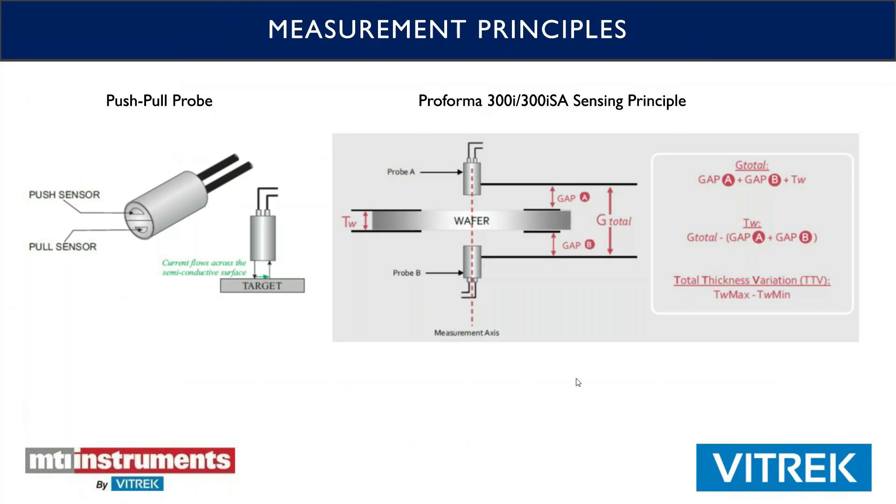Our Proforma 300i is a manual gauge. So basically it's probably the size of a big laptop. So you can put it right on your table or desktop. It has auto leveling. There's a bubble level. You can adjust it so it is parallel and flat for your surface. It's got a non-abrasive Teflon coated measurement stage.

So you just place your wafer on top of the stage, and you can see that the wafer here is in between the probes, and the measurement is shown on the LCD display. So it does have a big LCD display. It does have a USB port on the front, so you can store and log your data for your thickness variation, and there's also a bow measurement that you can do with the Proforma 300i.

All of our technology, both the 300i and the 300 ISA, give you an accuracy of a quarter of a micron, and a 50 nanometer resolution. So this can be used for wafers with a 1700 micron or 1.7 millimeter measurement range. So the probes are adjustable. So if you do have a thicker wafer, you can adjust it, calibrate it accordingly, and get your measurements.

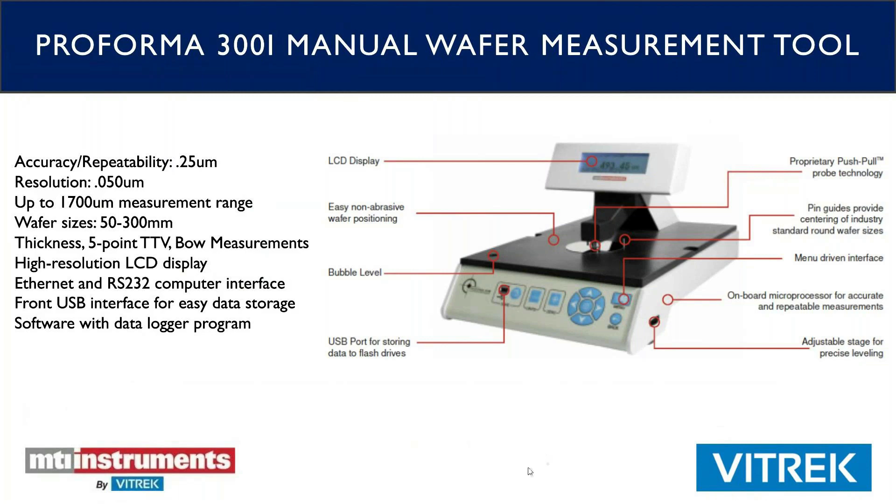And then here's a zoomed in picture of both the front keypad of the device, the display, and a quick snapshot of the data logger program. It does use a voltage from the top probe and the bottom probe, as you can see. And then you can export your data to Excel through a CSV file, save it through there. So you have all of that available to you. So it's a great tool to have on your workbench.

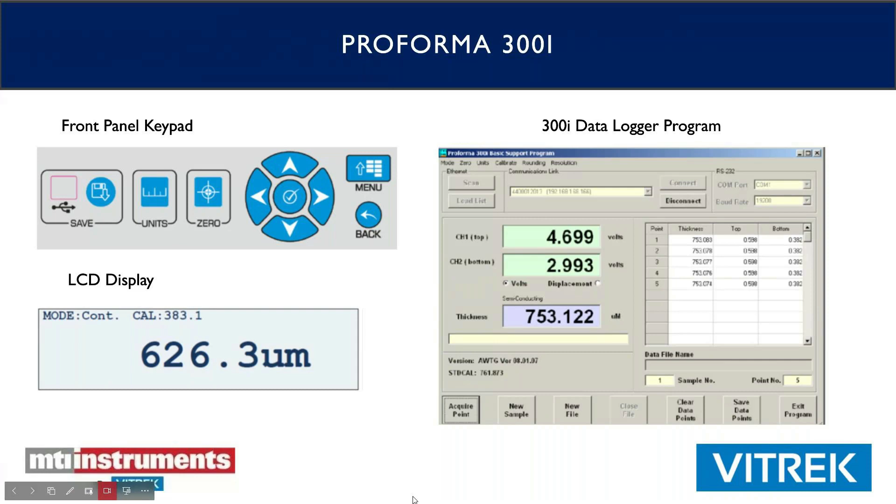The 300 ISA is our semi-automated inspection system. It does accommodate wafers between 75 millimeters and 300 millimeters. It does automatically scan your entire wafer, and it will give you a 3D map of your wafer for thickness and shape. So that includes, as you can see, thickness variation, bow, warp, flatness. There's a couple other things in there that if you need more information, I'd be happy to share with anybody. But again, in standard range, it gives you accuracy to a quarter micron with a 50 nanometer resolution.

With the system, we do have a strong software package. We do give a laptop with this. I'll go into the components in a second. And it does have Ethernet capability as well, so you can control this and monitor things remotely through the Ethernet. So it's got the network capability.

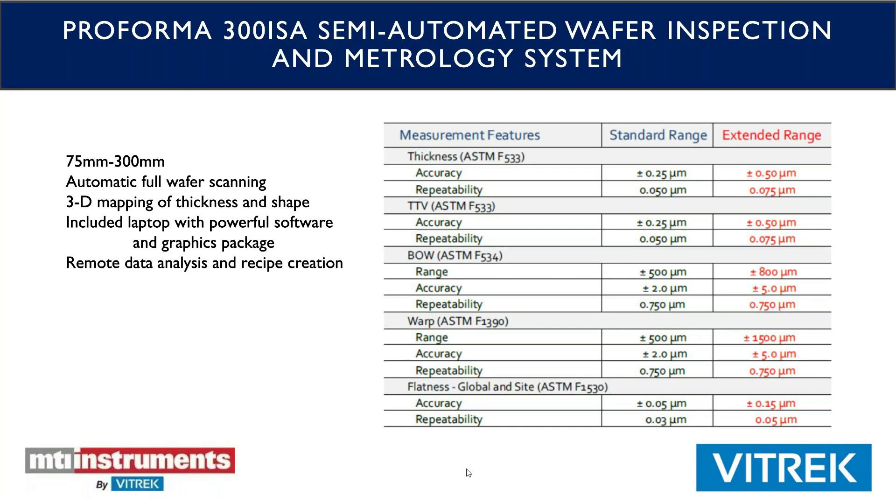And as you can see with the features here, it does meet the SEMI and ASTM standards. You can see for thickness, it's the ASTM F533. Bow is 534, warp is 1390 if you're looking at home, and the flatness spec is to the F1530. So if you need more information on that, I'm happy to provide that. But those are the specs for this.

Now you can see the size. It basically comes in 3 different components. The controller controls the measurement stage, and that's where the data is gathered and is sent to the laptop computer. The middle is the measurement stage there. You can see the size. It does fit on a small table. You can move it around if you had to. But basically, it's like a big record player.

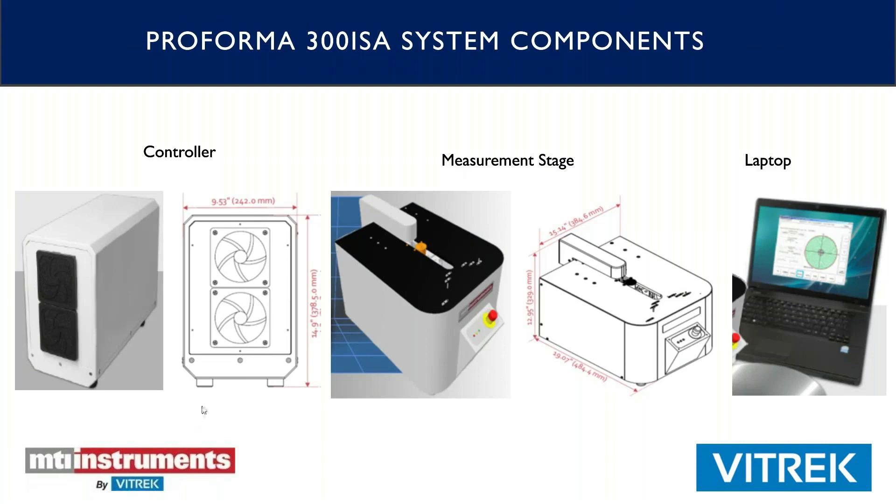So it's semi-automated in that you have to manually put the wafer onto the stage, but then you just press the button through the software. It spins the wafer around through the measurement stage, and gives you a precise map, XY data of your wafer. So you can actually see that coming through. So it's not a huge machine.

It gives you a full 1,000 micron measurement range without recalibration. You can actually measure thicker wafers than this with probe adjustments, but the measurement range, the variation is up to basically a millimeter in thickness variation there.

So it does meet all the ASTM standards, and it does use our computer interface; the software we give is a Windows user interface. You can save data through CSV. There's a couple different options for that. So it does have Ethernet connectivity, and it does meet the SEMI standards for both health and safety and ergonomic compliance.

So some of the biggest microchip manufacturers in the world use this tool. They'll take wafers off their line, do a check to make sure that the shape is what they need for the next step in the processing.

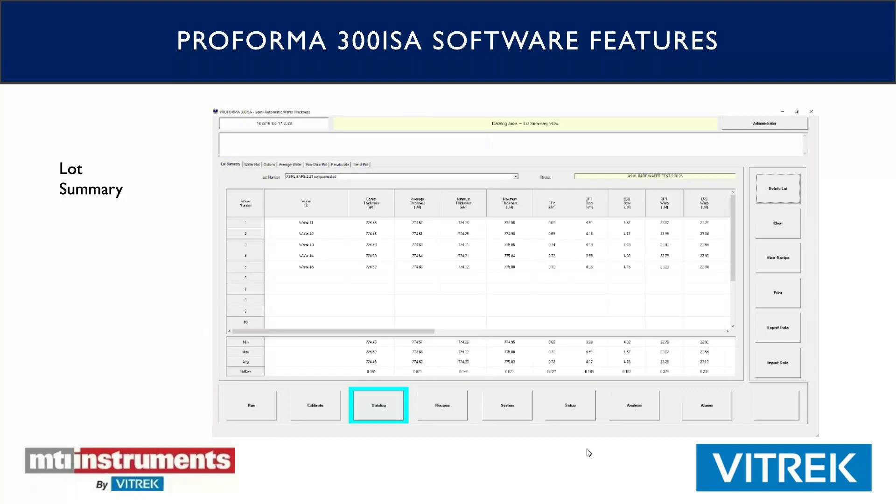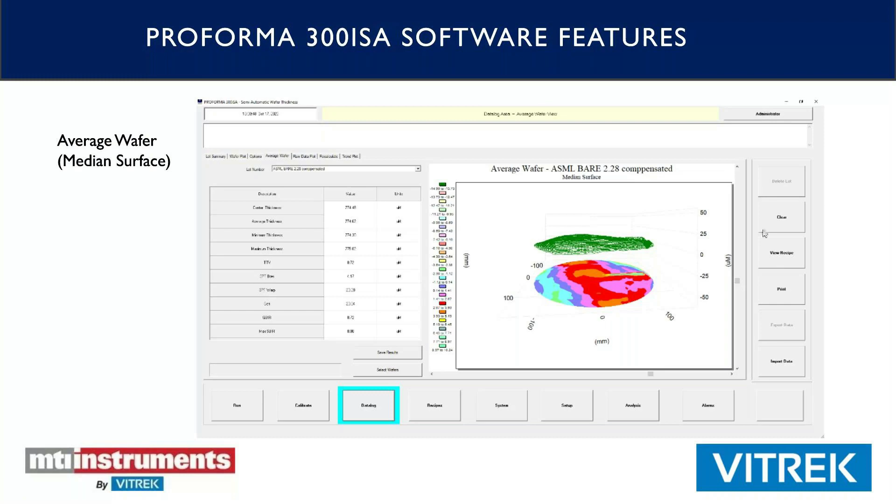This is the median surface. So you can see for the same wafer, the median surface is shown here. This is a 3D model, so you can actually look from the top, the bottom, and then there's a little guide here that shows you if there's any abnormalities or deviations from the center point. You will see that here. This is the median surface.

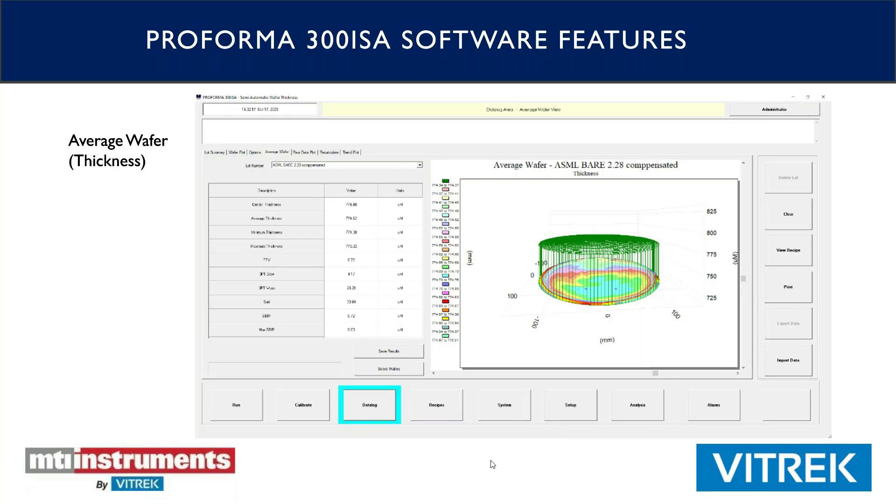So if you do want to set up your own scan pattern, you can do that. If there's only certain areas of interest, say you wanted to look at just the center point, you could look at that as well. So there's a lot of different things that you can do with the software to customize exactly what you're looking for here.

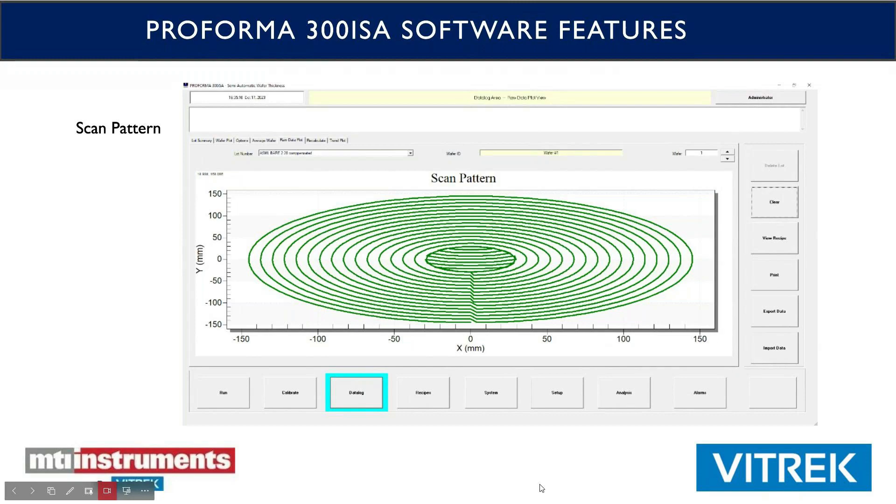Again, this is the raw data points part of the software. You can see that there's 3,200 points here, and then as far as the XY of the map, you can actually take a look and see where you're at with thickness at different locations of your wafer. So you have a good map of shape of the wafer there.